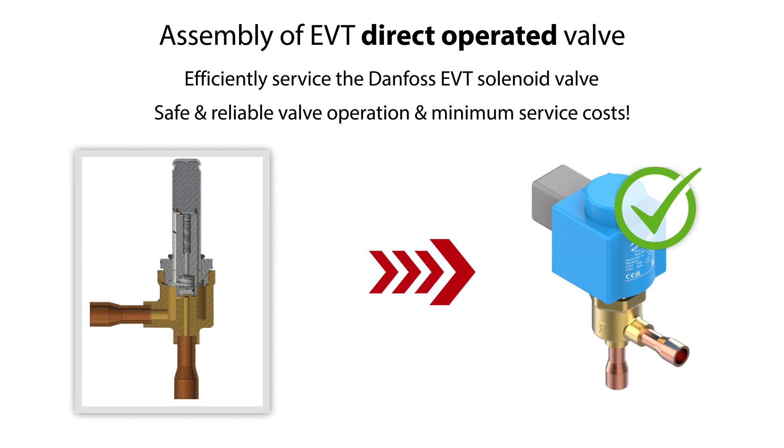In this video, we'll give you some tips on how to assemble the EVT direct operated solenoid valve, which you see here, so that you minimize service costs and ensure safe and reliable valve operation.

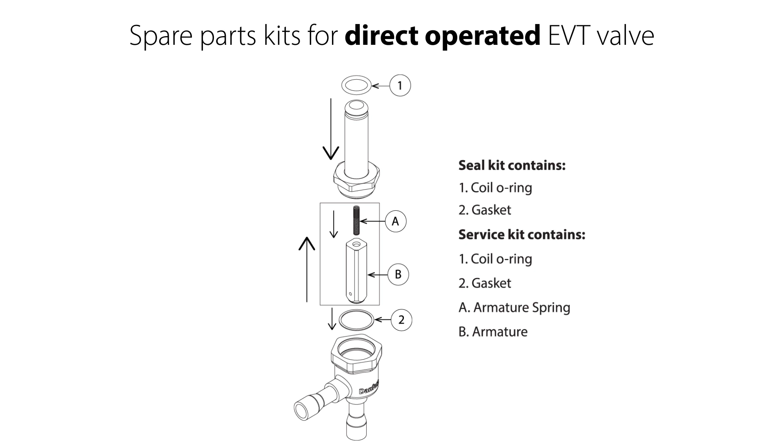You can use a seal kit or service kit, depending on what kind of service you're going to do. Please note that whenever you take the valve apart and reassemble it, you should always replace the metal gasket, seen here.

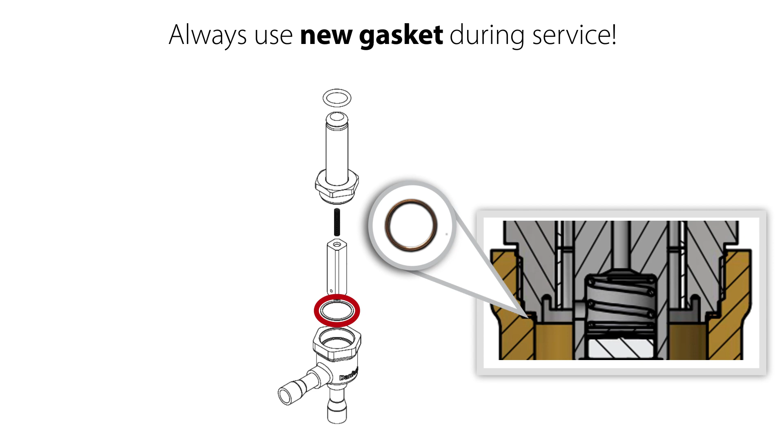When the valve is assembled, this gasket forms a metallic sealing through a minor metallic deformation. This deformation is permanent, and therefore the gasket should not be reused, since there is then a risk of external leakage once the valve is back in operation.

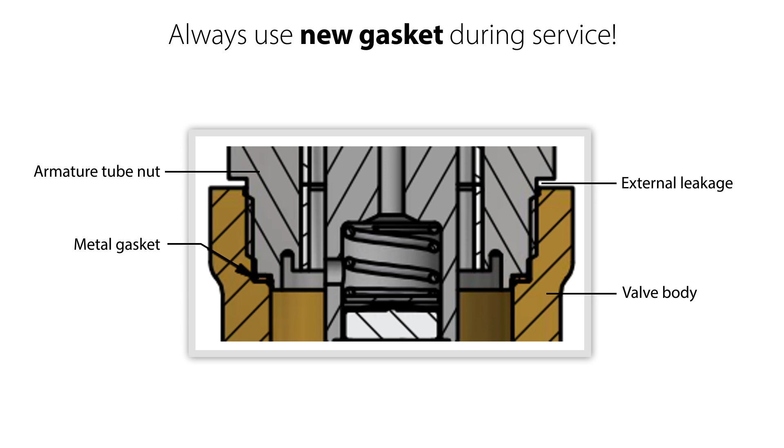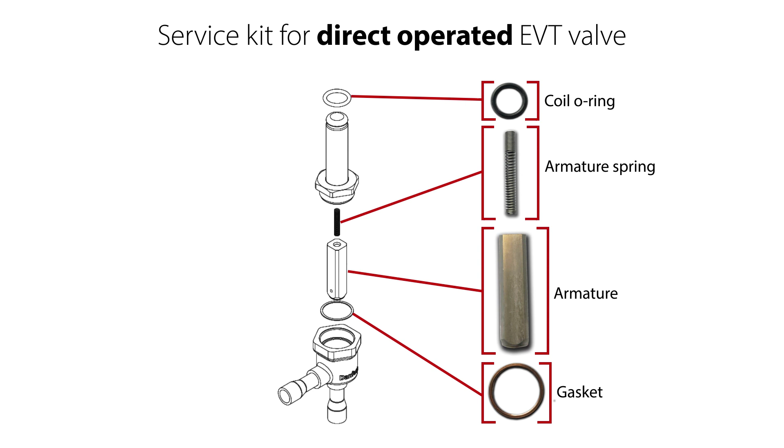So always replace the metal gasket. For this purpose, you can use the seal kit seen here. If you also need to replace other worn internal valve parts, then you can use the service kit seen here.

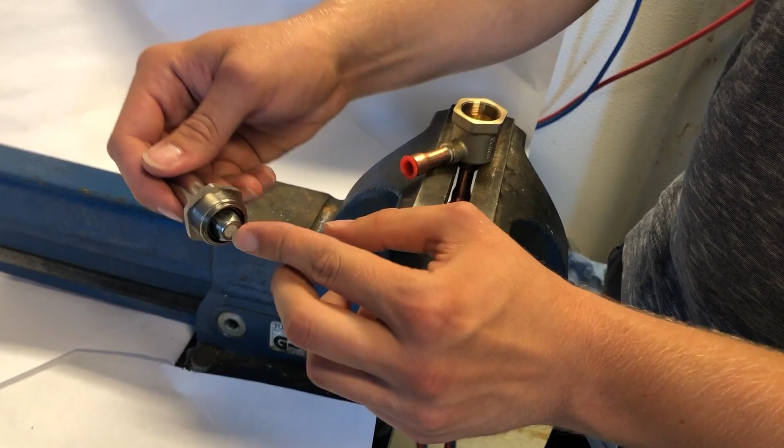Firstly, carefully mount a new metal gasket into the valve body. Then mount the armature into the armature tube. Make sure that the armature spring is correctly mounted into the armature, as seen here.

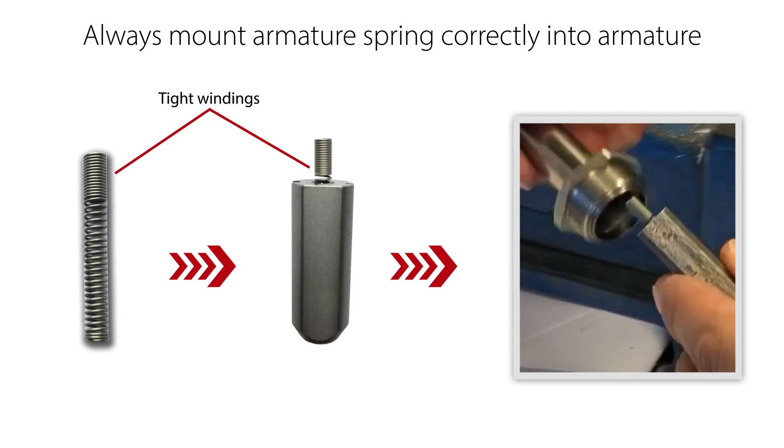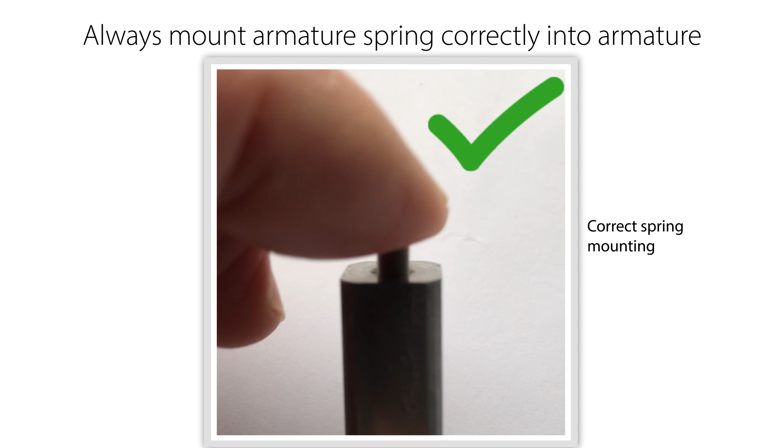It is important that the armature spring is mounted so that the tight windings are pointing out of the armature, as seen here. This spring design ensures that the spring does not tilt and get damaged during compression when the valve is opened. This ensures a long spring lifetime and therefore also a reliable valve operation with long lifetime.

Now carefully mount the armature tube assembly onto the valve body and tighten it by hand, as seen here.

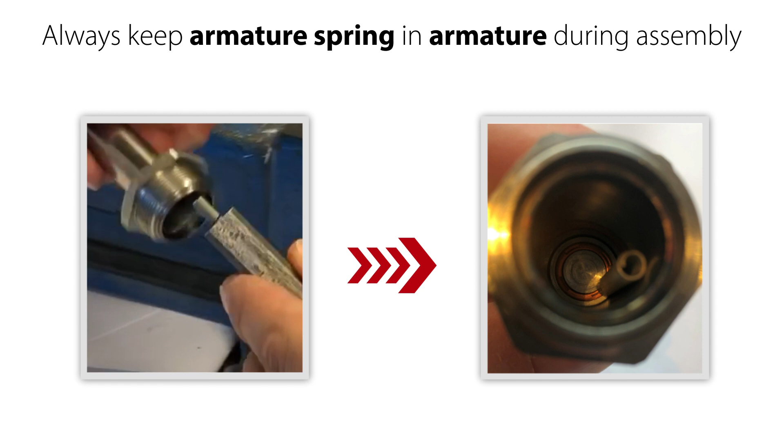Then carefully tighten the armature tube assembly by using two wrenches, as seen here. One wrench for tightening the assembly and one wrench for counter-holding the valve body to avoid stressing the valve connections and the piping. Torque tighten the armature tube assembly to 80 Newton meter.

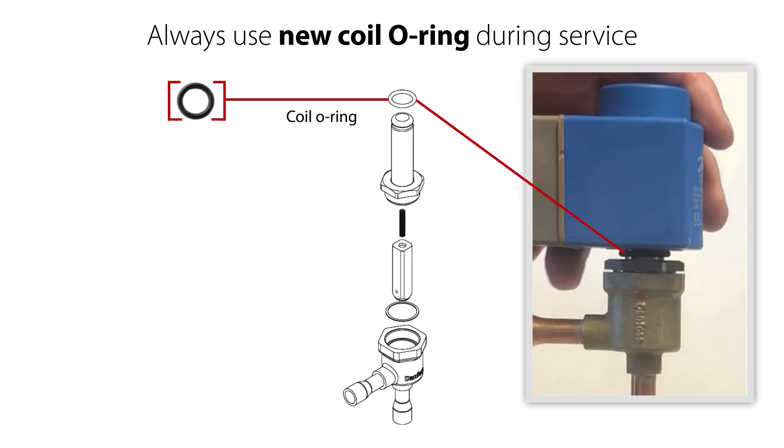Before mounting the coil, it is recommended to replace the coil O-ring, seen here. This O-ring is by compression sealing against moist ingress into the coil, which might cause the coil to burn out.

Since the EVT valve is designed for high temperature operation, the coil O-ring elasticity might get less over time, and if reused during valve service, there might be a risk of less sealing capability, risk of moist ingress into the coil, and therefore risk of coil damage.

So replace the coil O-ring.

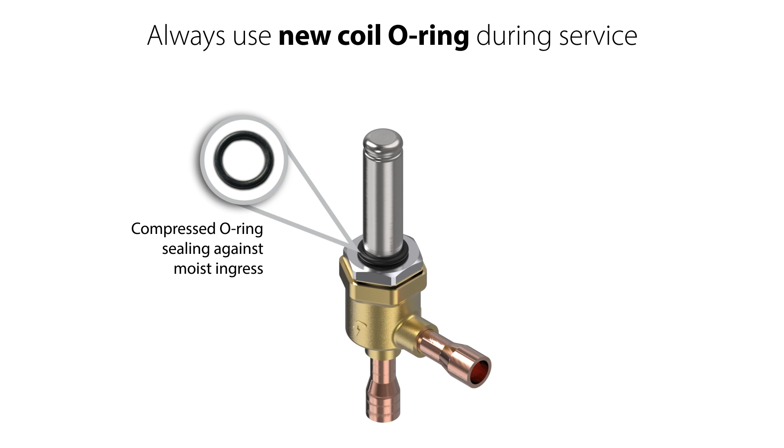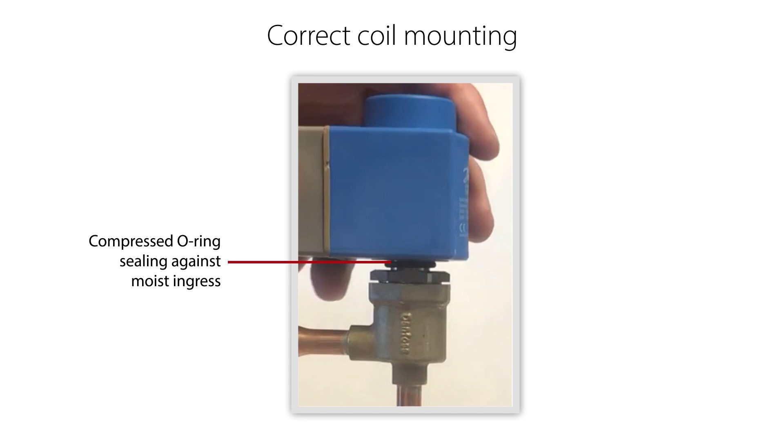Mount the new coil O-ring onto the armature tube. Then mount the coil onto the armature tube and press by hand until you hear and feel a click. This ensures that the coil is correctly mounted and that the sealing between valve and coil is correct.

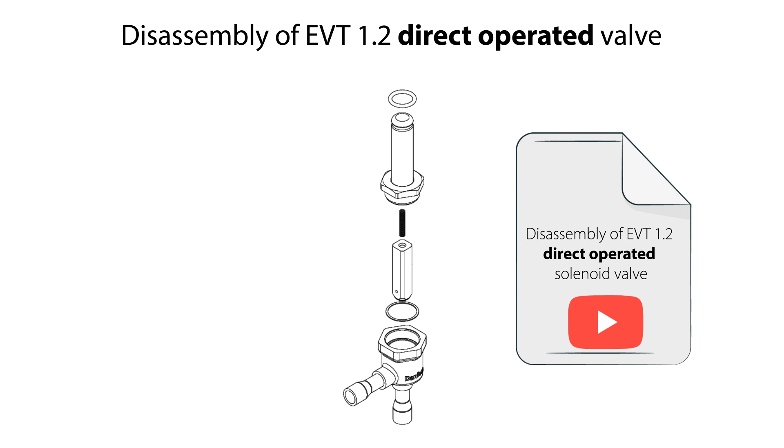Now for disassembly of the direct operated EVT valve, have a look at the separate video about this and follow the important tips we give. And have a look at the other online learnings about the EVT CO2 solenoid valve.

So now you know how to assemble the EVT direct operated solenoid valve and why it is important always to replace the valve gasket and the coil O-ring if you service this valve, and why it is important to locate the armature spring correctly in the armature and ensure it remains there during assembly.

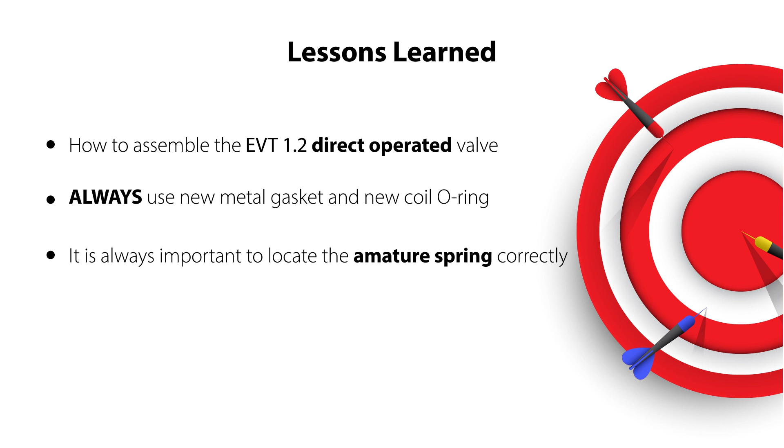This way, ensuring you have a safe and reliable valve operation with minimum service costs.